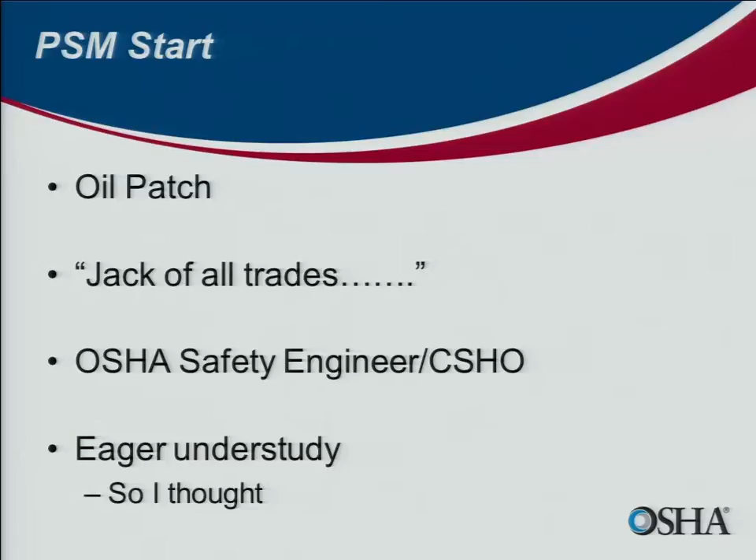So here's the timeline. And here's where I get lucky or unlucky, depending upon how you look at it. So we got the PSM perfect storm, if you will, the PSM dominoes. Back about 1974, we have the event in the UK at Flixborough. It's a PSM incident. It's probably where management of change first comes on the radar as a big incident. Then in 1984, we have the Bhopal incident. And then, can that happen over here on this side of the water? Well, Bhopal is a Union Carbide facility. Within the next couple of years, at Institute, West Virginia, at another Union Carbide facility, another MIC release.

Now, this has got Congress real nervous, all right? So all of a sudden, we start looking at the possibility of a PSM regulation coming to fruition. And if you think the regulatory climate right now is really bad, even back then, 20 years ago, it was hard to promulgate standards. Back in 1990, we promulgated the lockout-tagout standard. Pretty straightforward safety standard, right? Guess what? It took 17 years to get that thing finalized. So things took a long time 20 years ago also. So anyway, we got this Union Carbide facility event in Institute, West Virginia. And then, like I said, Shell Norco, May 8th, 1988.

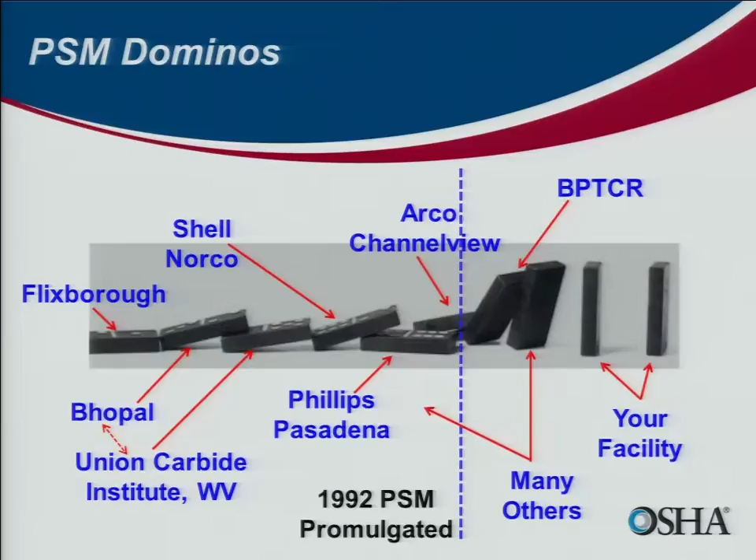All right, the PSM standard. It's a performance-based standard, okay? You write down what you're going to do, you say what you're going to do, and you do it. You perform. You demonstrate that you have performed under the requirements of the standard. I think the writers got it right. I mean, this covers all kinds of industry. I think we covered 127 different SIC codes under this standard.

So whether you're making chemicals or you're using chemicals like ammonia refrigeration, there's all different kinds of process. It had to be a performance standard. The writers got it right. They also included one of the other pillars at the request of industry, this RAGAGEP concept. They originally proposed it like they were going to require some specific NFPA and API requirements.

Industry wrote back and said, no, you can't do that. Things change, and it might not be applicable to our plant. And the writers said, okay, we understand that, so we're going to include this RAGAGEP concept. This is a system standard, okay? You write it down. You tell us what codes and standards you're going to employ, and those are the ones that we're going to hold you to, the RAGAGEP. So that was a big pillar as part of this, where the PHA is a big pillar of the standard, but RAGAGEP is major in my mind.

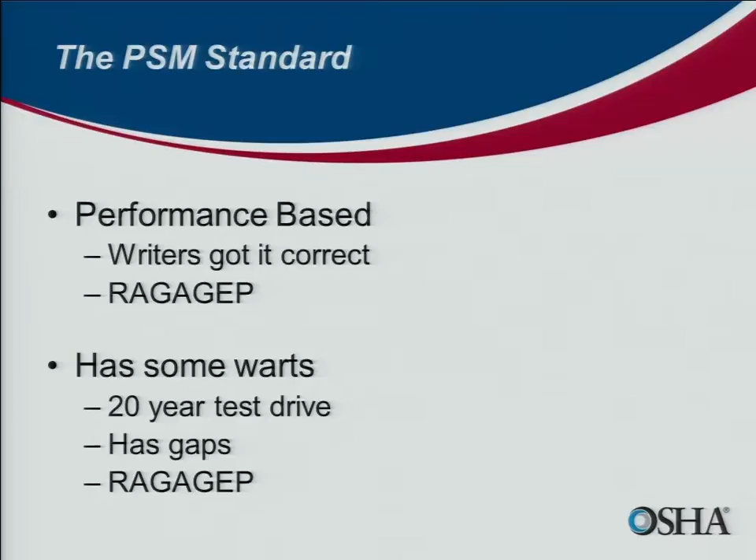So one thing that I've seen over the years is for the chemical standards, PSM, HAZCOM, HAZWOPER, lockout/tagout, confined space.

Basically, industry as a whole, not everybody, but industry as a whole, you guys accept this stuff as second nature, all right? So I think the message here is, whenever government thinks that regulation needs to be proposed, we hear the world's going to come to an end. Well, eventually that rule gets enacted, and after a few years, everybody implements it, shakes it out, takes it for a test ride. Over the years, all of a sudden, it's second nature.

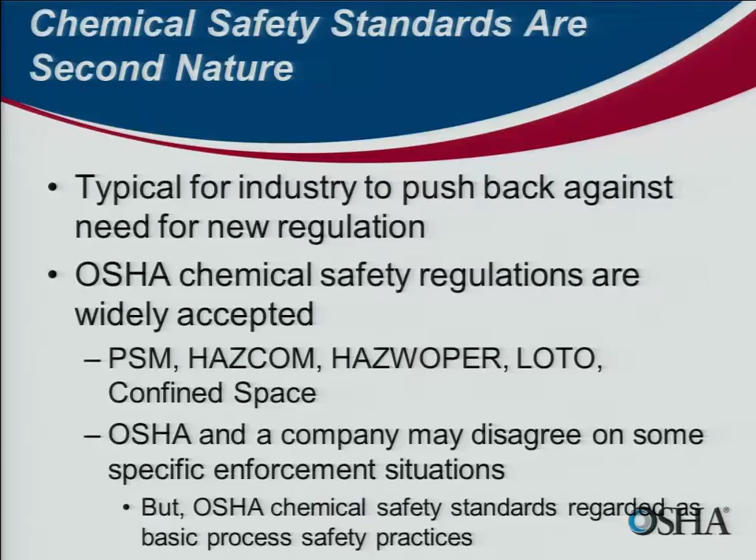So if there is ever a new rule coming down the road, the sky is not going to fall. It's probably a real good thing for you, all right? And again, I believe industry, for the most part, has accepted these things. I think these are strong, and you do them daily, and you think this is a good business that needs to be done.

All right, what else have I learned over the years? Basically, there's 3 kinds of employers out there. I've heard some people say maybe there's 5, maybe there's 7, but to me, basically there's 3. There's a basic bell-shaped curve. Out on one end of it, I put it under the green, we've got the world-class employers. This regulation stuff, it kind of gets in their way. They do it, but they go way beyond it. The culture is great. You walk into their facilities, and it's just kind of oozing all over the place. I mean, you can tell when you walk into these kind of places, okay?

On the other end of the spectrum, I call them in the red, the low roaders, all right? These guys don't get it. They don't want anything to do with regulations. They're not going to put up the resources that they need for whatever reason to make their place not only a safe place, but a safe place that can make money. They don't typically understand the business case for process safety. All right, these guys are the low roaders.

All right, now we got this big chunk that's in between. Some of the characteristics of the typical employer that really wants to keep a process safe: they understand the business case for process safety. They're not as committed to it as the world-class people, but they understand it. They seem to have an adequate resource commitment for safety. They are committed to the safety of their employees, and they want to do what's right, okay? But here's one other characteristic.

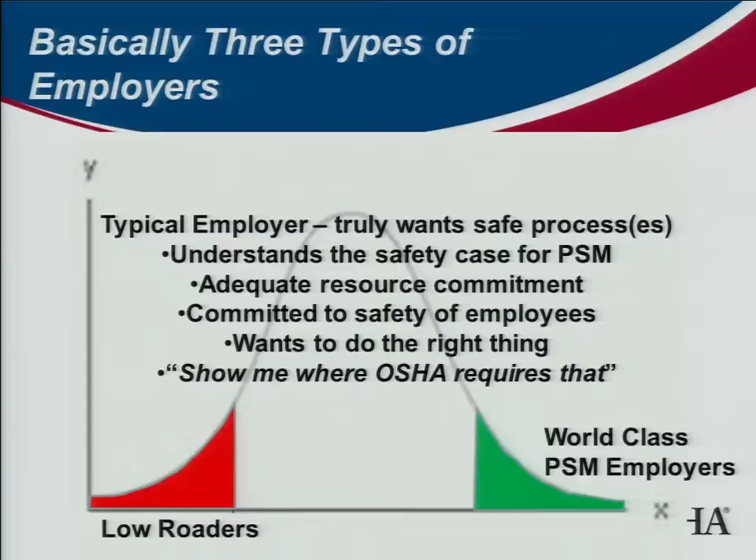I get these calls all the time, or I'll come to a conference like this, and I can guarantee you before I leave on Wednesday afternoon, at least 5 of you will pull me aside in the hall and say, "Hey, Mike, I got this situation here. I can't sell my boss on it, and I think we really need to do it. Can you show me somewhere where OSHA has said that we need to do X, Y, and Z?" I said, "Well, yeah, I can show you. I'll send you an email. I got an interpretation from 1993 on that," or something like that. Or, "Now, we don't have anything written, but you can go back and tell your boss that big guy from OSHA who stood up, he said we got to do this." So we try to move safety along like that.

All right, so what else do we hear at OSHA a lot? The big companies, they say, it doesn't happen to us. It's the small companies that have the big accidents. The smalls are making us big guys look really bad. All right? An example, BP Texas City, it's not always so, right? Tesoro event out in Washington, Formosa, Valero.

Then on the other side, we got the small guys. They say, "We know how to handle it. It's not a problem. We don't have as much to manage as those big 300,000 barrel refineries. We got this covered because we don't have as much to manage. So don't bother us. It's the big guys that are the problem." But when you look at the incident history, we got Concept Sciences. We heard about T2 and West Pharmaceuticals. And you can go read about all these events on the CSB incident sites.

So to me, a lot of this, the large majority of this, is about implementation. What have we seen over the years? What typically happens: you have a big event, OSHA comes and knocks on your door, they walk us in, and they put us in a library till we can get to a person we need to talk to about the opening conference and getting out in the facility to start the inspection right away, because we've got a big incident here.

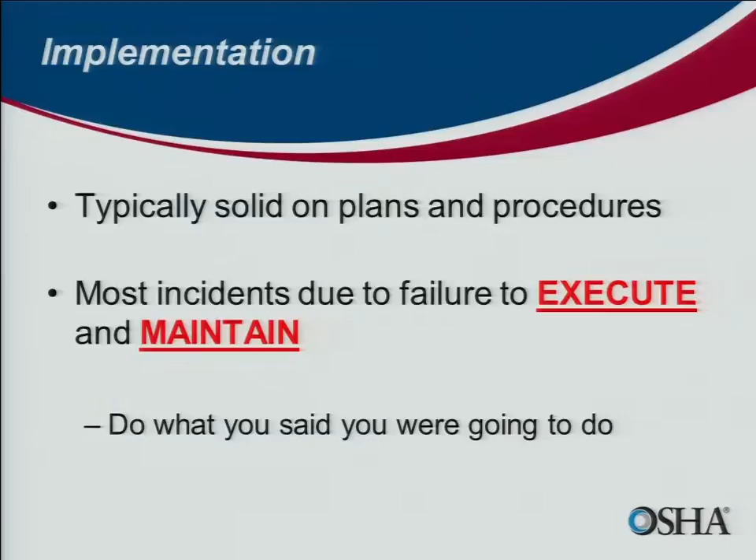execution, and maintenance. Heard it several times today already. Call it something different, but it's execution and maintenance. Do what you say you're going to do, and do it, and keep doing it. Not meaning to pick on BP here or anything. You've got a couple of incidents here with BP, but it could happen to you. That's the takeaway: it's going to happen to me. That's why you need to be vigilant.

But I read in a couple places related to the Deepwater Horizon event that it's a 10 to the minus 7th rig event. 10 to the minus 7th. That's a lot of zeros. Very small probability of this thing ever happening. Do I have to do anything else, because it's already 10 to the minus 7th? Well, maybe not, but guess what?

That assumes all those systems that are making that a 10 to the minus 7th event are being executed and maintained. If they're not being executed and maintained, that 10 to the minus 7th keeps dropping, 10 to the 6th, 10 to the 4th, 10 to the 2nd, until something happens. So the old broken chain model about incidents: maybe if one of those links isn't broken, one of those systems works, maybe Deepwater doesn't happen.

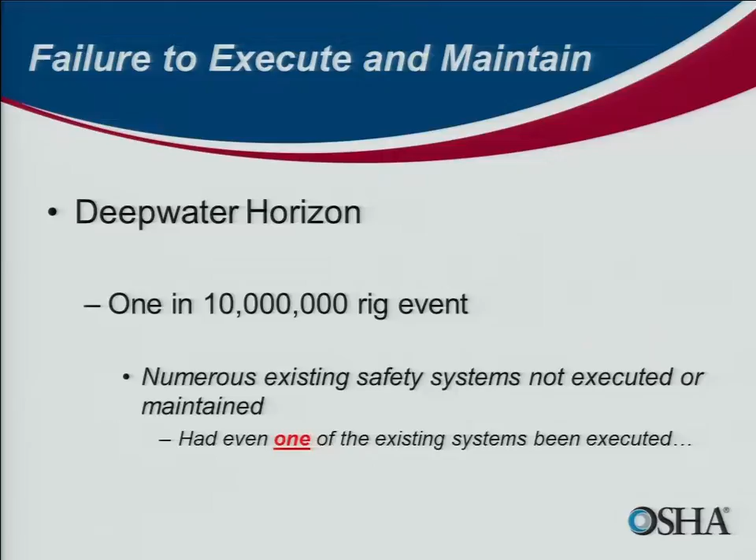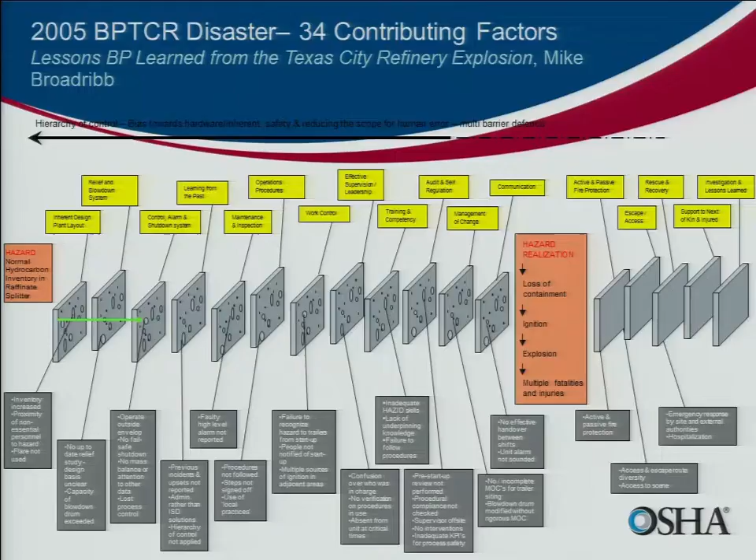Heard a little bit about this earlier. I guess the term nowadays is one-off incidents. We had an incident. I don't know how this happened. This never happened before. Most cases, yeah, it has. In almost most cases, yes, it has. There's a few one-off incidents.

Probably the one I can appreciate most recently is what industry has learned about storage of flammable liquids, overfilling tanks, and guess what? You can have unconfined vapor cloud hazards from these things. We saw that at Buncefield. We saw that at Caribbean Petroleum down in Puerto Rico. There was an event over in India. So that's kind of a new hazard that's surfaced. Industry really wasn't in tune to that.

But guess what? Most of this stuff is not new. Jack mentioned Trevor Kletz. We've got his whole What Went Wrong series. Tremendous learnings there, as he says. The last point on that: Irv Rosenthal, who was a board member with the CSB, was giving a talk probably in the late 90s, and he says, guess what? 90% of this stuff has happened before. We keep doing the same thing over and over. We have to learn, and we have to change what we're doing.

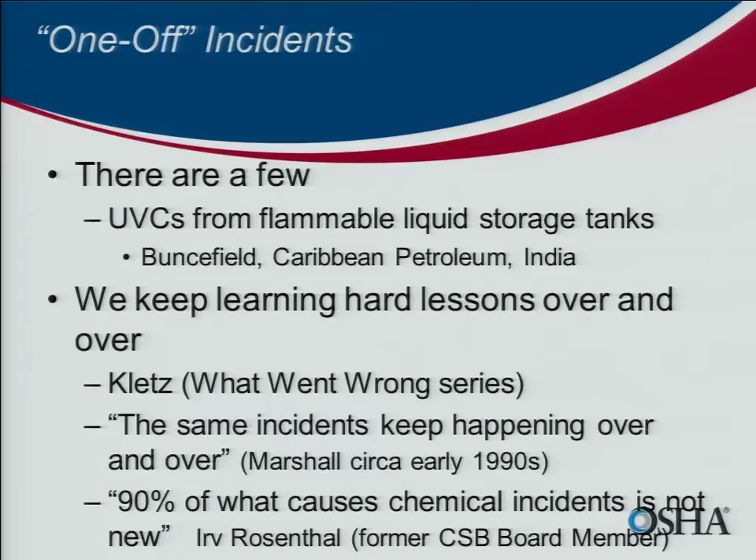John says facility siting is important. It's absolutely important, this one especially for me. I've been to Shell Norco. This is back before DNA, where they had to bring in the FBI fingerprint analysts to identify some of the operators. What happened at Shell Norco was an 8-inch overhead line from a depropanizer column failed,

and it actually was oriented such that the vapor pointed right down. There's this massive vapor cloud over the top of this old masonry block control room. And 90 seconds later, it ignited, and it just literally rubbled, if you will, the control room. Six of the people that died in that event were in that control room. Another guy in another block control room was coming out of that when that one failed and killed him.

Phillips, Pasadena, 23 people killed in that event. Old block control room, kept building and building, and more congestion. The major congestion confinement events as far as Pasadena and Shell Norco went. Two trailer events. Pennzoil, Rouseville. This happened back in 1995. That tool trailer, 5 people got killed in this event. Two of them were welding on a tank. Three were in and around this tool trailer.

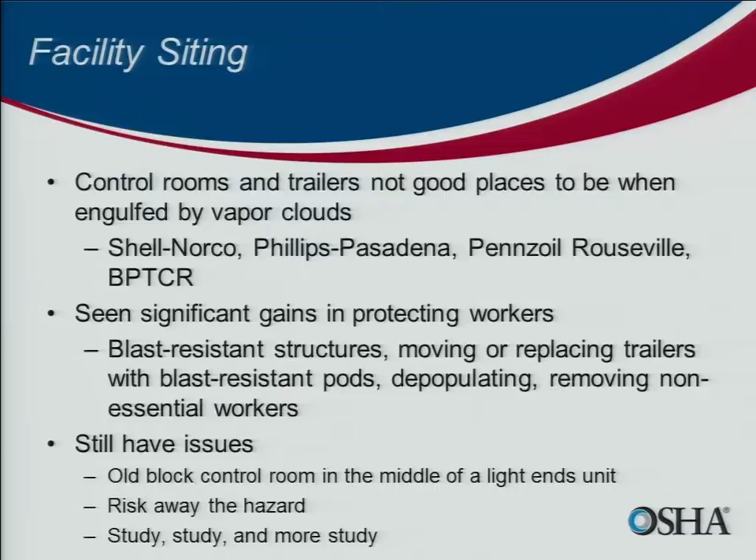Then the next one said, we got a problem, but we need to study it. Then the next PHA said, well, we didn't do the study, so we need to do some more study. And today, it's still there, and it's still being studied. So we got to get some resolution on these things. If nothing else, make sure the easy ones, like removing non-essential personnel out of the area, get that done right now.

PHA is another good point. For those of you that were around for the first rounds of PHAs, they were kind of ugly. This was a new tool that was coming on board for a lot of people. But with each successive round of PHA revalidations or complete redos, they're getting a lot more sophisticated and they're getting better. So that's the good news. We still got some problems with some resolutions.

Your PHA team goes out and identifies a problem, gives it to the employer, but guess what? Things don't get done. Sometimes these are pretty easy too, low-hanging fruit stuff, we call it. And for whatever reason, they don't get done. So go back to your plant, take a look at your list. What do you got that's outstanding? Get that taken care of.

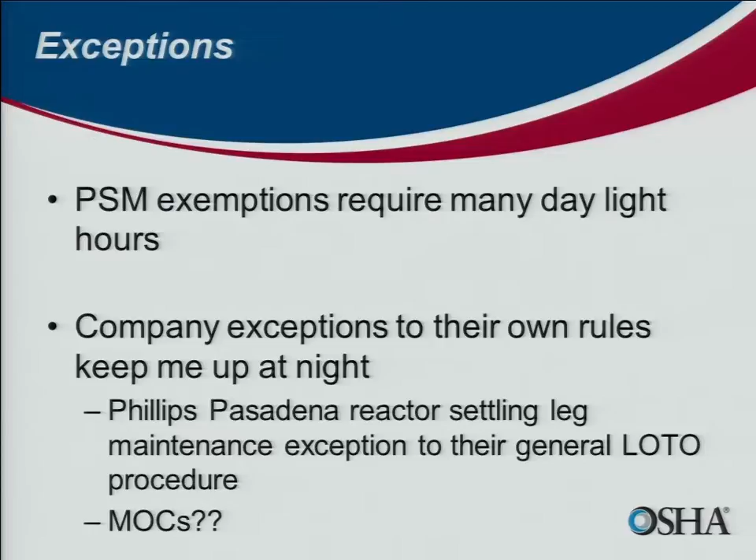So really, what are we talking about here then? Nowadays we call them MOCs, something different from your regular procedures. Think about them. Think about them a lot.

Something else that I've seen over time is we go into a facility and they tell us, well, we've got 2 PSM covered processes and we got 5 that aren't covered. But don't worry, Mike, we got it covered because we treat those non-covered processes just like our PSM processes. You do? Are you sure? Is it really more of a goal? We've seen cases where it turns out it's a goal.

Now, are you required to treat those non-covered processes just like your PSM process as far as OSHA is concerned, complying with the regulation? No. Are you required to have a safe process? Yes. So if you're going to do almost everything for a non-covered process as you would for a PSM covered process, go the whole way. That's what I'm trying to tell you here.

Example. Back in 2001, at a BP polymer facility in Augusta, Georgia, 3 operators got killed. Non-continuous process, batch processes, and every time they had to start up or shut down this reactor, they'd have some off-spec polymer that they'd shoot to this little catch tank. Pressurized catch tank, catch pot. And every once in a while they had to open up this catch pot and clean out all this old polymer so they had room for the next batch.

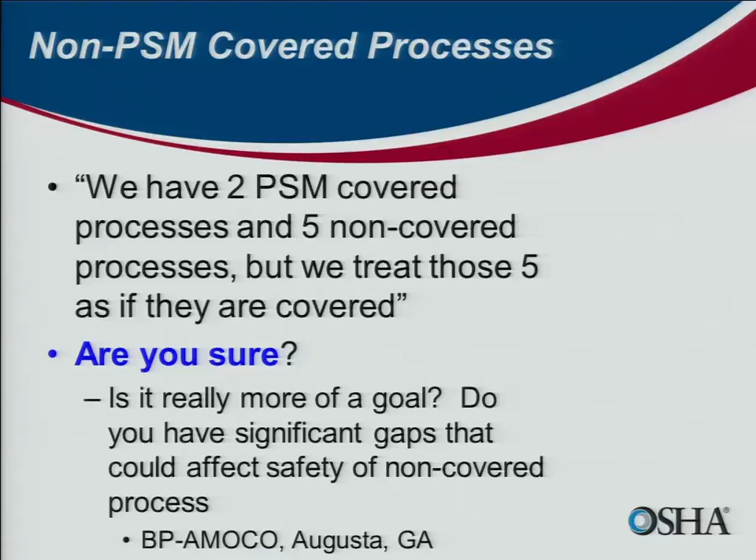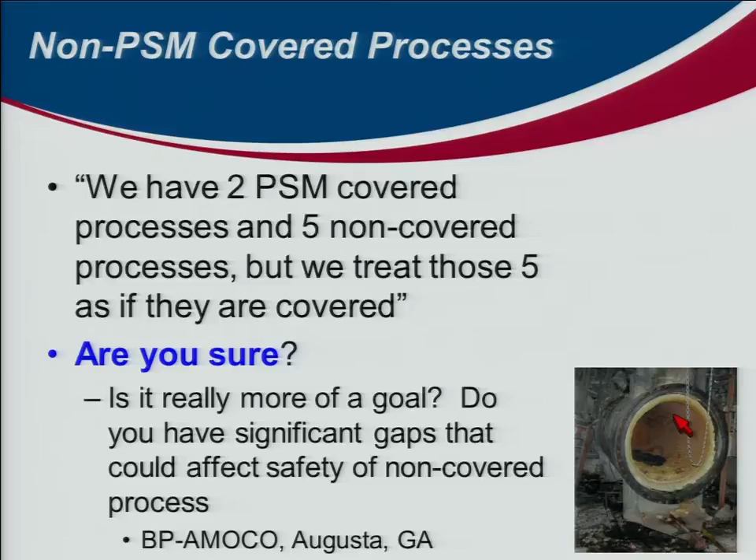And we talked about incidents. You got opportunities to learn. There were all kinds of different opportunities to learn prior to the big event that happened here. There's looking at the inside of that catch tank, and you can see the yellow. That's the caked up polymer. CSB says it measures, depending upon each time they open up, anywhere from 3 to 5 inches along the inside of the vessel.

We heard this before. Personnel safety, hard hat safety does not equal process safety. All right? Big event happens. Lots of times we'll have people that come in and talk to the head of OSHA and say, hey, yeah, we had the big event, but our injury rates are way below the national average. And that kind of gets him real fired up because he understands that process safety and employee safety aren't necessarily the same thing. All right? It's not an excuse. It's one thing I learned. Okay? What is it? That's 811?

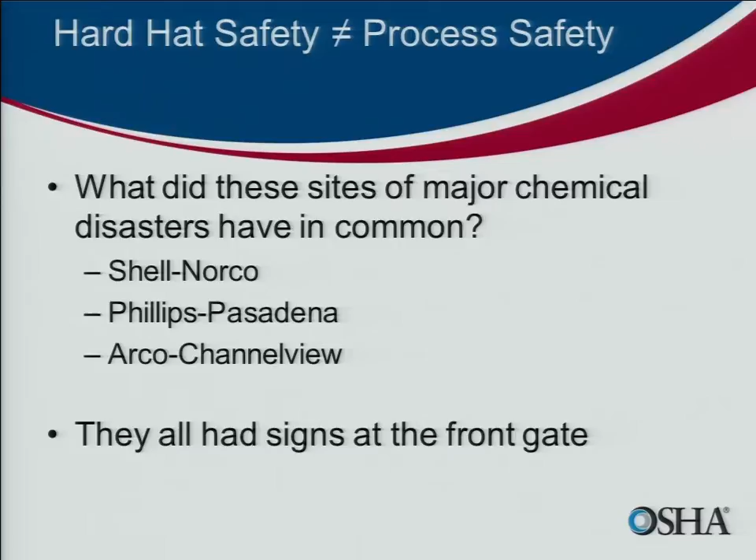The first 3 big incidents that I went to, Shell Norco, Phillips Pasadena, Arco Channelview. What did they all have in common besides they blew up and they were big disasters? Does anybody know? They had a great personal safety record. They all had signs at the front gate. This blew me away. They all had 1 or 1.5 or 2 million man-hours without a lost time accident. Back in the early 90s, I'm asking myself, where's the disconnect here? Because, as we've learned over time now, personal safety does not necessarily mean you've got good process safety.

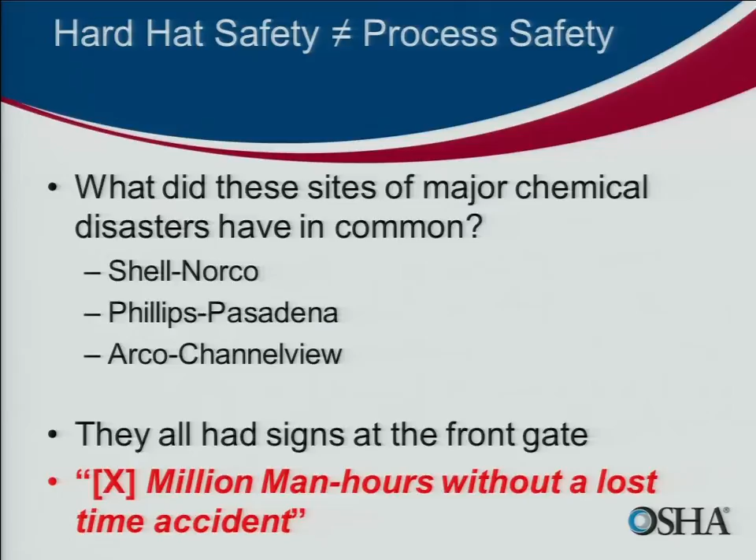So my last slide here is the safety car analogy, okay? We're all in process safety together. Check one. And him too. We got the front seaters, okay? We've got the employers and we've got the employees. The employers have at stake their workers' safety and health and their financial interest. We have the workers who've got their well-being and their livelihoods at risk.

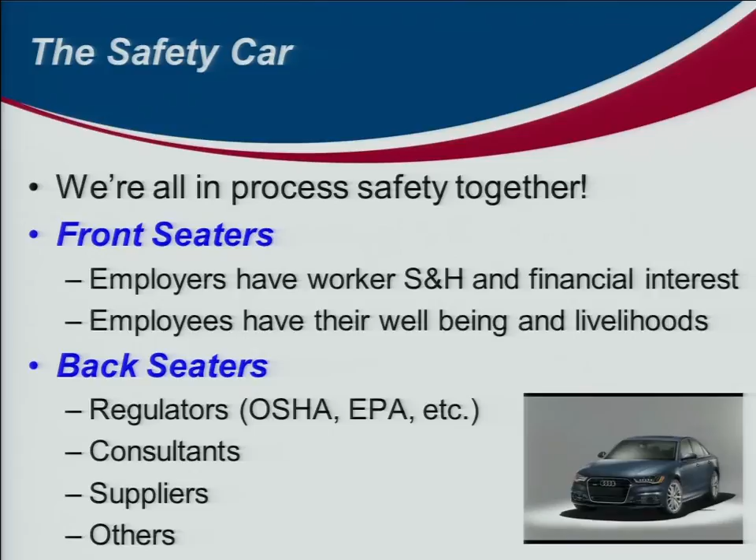And then we got the rest of us. We're the backseaters. We're the regulators. We're the CSBs. We're the associations, CCPS, IIAR, the consultants, the suppliers, everybody else. We're all in this together, all right? It's a journey. We got to work it together, and that's it.